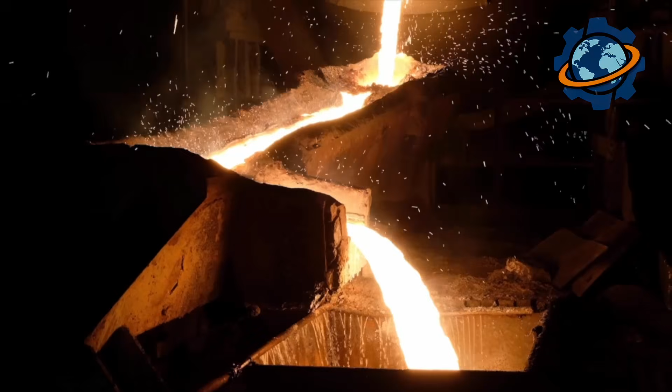Stand at Ground Zero, New York City. One World Trade Center rises 1,776 feet, a deliberate height honoring the Independence Year. This building contains a promise: it will never fall again. That promise lives in 45,000 tons of structural steel and 200,000 cubic yards of concrete.

But concrete alone crumbles under stress. What gives it strength are 300 million pounds of steel rebar, ribbed bars running through every column, every beam, every floor. Each bar began as scrap metal melted at 3,000 degrees, rolled into ribbed shape, cut to exact length, trucked from a South Carolina mill to Manhattan, and positioned with surgical precision.

How does a junked car become the foundation of America's safest building? Why does rebar require ribs instead of staying smooth? Stay with us. You'll witness an electric arc furnace creating artificial lightning and discover rebar's critical secret. Those ribs aren't decoration, they're a mechanical bond preventing concrete from tearing itself apart.

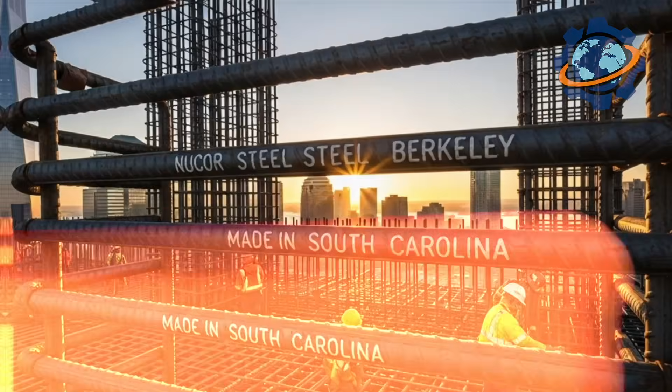Nucor Steel Berkeley in South Carolina produced most rebar for One World Trade Center. This facility processes 2 million tons of scrap steel annually, enough to build 12 Empire State Buildings yearly. The scrapyard stretches a quarter-mile. Mountains of crushed cars, demolished buildings, retired appliances, old rebar from previous demolitions. Giant electromagnets lift entire automobiles, dropping them into sorting lines separating steel grades.

Every day, 600 trucks deliver scrap. Every day, 400 trucks leave carrying finished rebar. Walk the scrap processing area. Shredders pulverize cars in 8 seconds, the same time it takes to read this sentence. Hydraulic shears cut structural beams like scissors through paper. The noise is relentless. Metal tearing metal, magnets clanging, conveyor belts grinding.

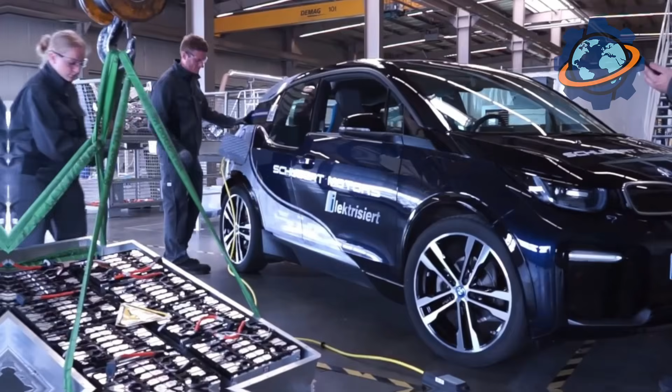The electric arc furnace transforms scrap into liquid steel through controlled lightning. This vessel, 40 feet in diameter and 30 feet deep, contains 3 graphite electrodes 2 feet thick descending from the roof. When 90 megawatts flow, power for 70,000 homes, arcs jump between electrodes and scrap, generating 5,800 degrees. The scrap melts in minutes. Watch through protective glass as metal liquefies, glowing white hot then orange as temperature stabilizes.

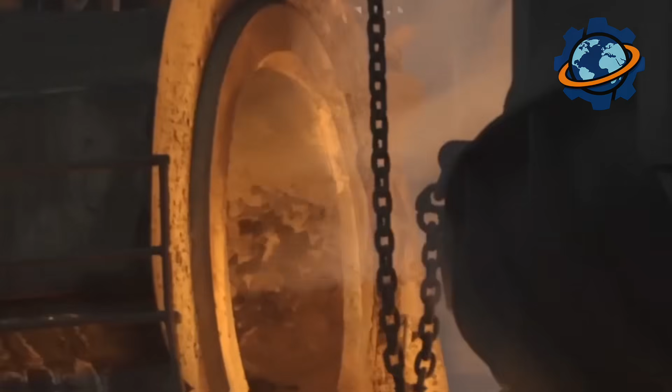200 tons of scrap loads per batch. The electrodes pierce the pile, current flows and artificial lightning strikes continuously. The sound resembles continuous thunder. The heat radiates through the observation room despite water-cooled walls. Oxygen lances inject pure oxygen at supersonic speeds, burning impurities. Carbon oxidizes to gas, sulfur evaporates. Phosphorus combines with lime, forming slag that floats atop molten steel.

Temperature control is absolute. Too hot wastes energy, too cool leaves impurities. Computer systems adjust power and oxygen flow thousands of times per melt, maintaining the exact chemistry required for construction-grade rebar. Tapping releases 200 tons of liquid steel into a ladle, a refractory-lined bucket mounted on a railcar. The pour takes 8 minutes, a continuous stream of glowing metal creating updrafts lifting dust into the air. Workers monitor from shielded stations, faces illuminated by orange glow.

The steel, now 3,050 degrees, travels to the continuous caster where transformation into solid bar begins. The caster pours molten steel into a water-cooled copper mold, oscillating rapidly. As steel contacts the mold, the outer shell solidifies while the interior remains liquid. The strand, a continuous ribbon of solid steel, emerges from the bottom, bent gradually from vertical to horizontal through a roller system.

Torches cut the continuous strand into billets 20 feet long, each weighing 4 tons. These billets, still glowing red at 1,800 degrees, feed directly into the rolling mill. The entire process from scrap to billet takes 90 minutes. For the WTC project, Berkeley ran 3 melts daily, producing 18,000 tons monthly during peak construction.

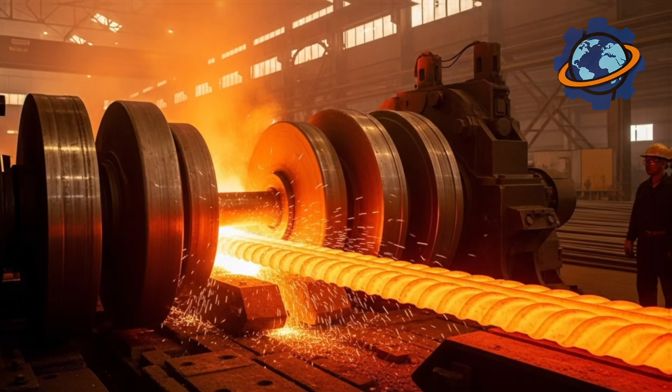The rolling mill transforms square billets into ribbed rebar through precision violence. The billet enters the roughing stand where rollers squeeze and elongate it, reducing thickness while increasing length. Each pass through successive roller stands further reduces diameter. The steel, maintained at 1,600 degrees, glows orange-red, extending like taffy under roller pressure. 22 passes transform a 4-ton billet into 500 feet of rebar.

But here's where rebar gets its identity: the ribs. Special roller dies emboss transverse ribs and longitudinal ridges onto the surface. These aren't decorative. The ribs increase surface area by 40%, creating a mechanical bond with concrete. Smooth bar would slip under stress. Concrete would crack and fail. Ribbed bar locks into concrete through friction and mechanical interlock.

The rib pattern follows precise standards: height, spacing, angle, all controlled to thousandths of an inch. For WTC, specifications demanded grade 75 steel, yielding at 75,000 psi, 3 times stronger than standard residential rebar. After rolling, the rebar, still 800 degrees, enters the cooling bed where water jets control cooling rate. Fast cooling creates hard but brittle steel. Slow cooling produces soft but weak steel.

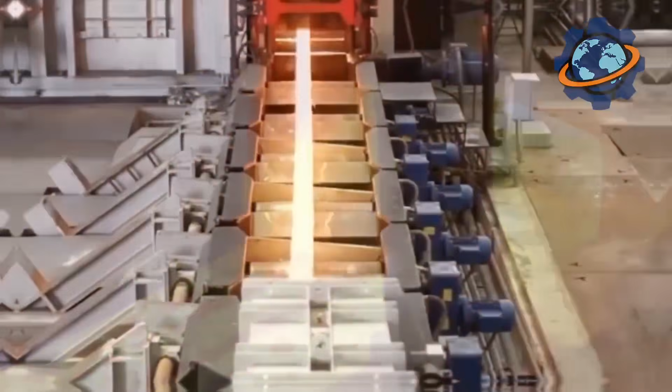Controlled cooling achieves optimal balance. Computer systems adjust water flow based on bar diameter, steel grade, ambient temperature. The bars cool from orange to black in minutes, steam rising in clouds.

Then comes straightening. The hot rolling process introduces slight curves. Straightening machines grab bars between sets of rollers positioned at angles, pulling and pushing until perfectly straight. Deviation under 0.01 inches per 40 feet.

Next, shearing machines cut bars to exact lengths. For WTC, typical lengths were 40 and 60 feet, sized to fit concrete forms with minimal waste. Flying shears cut moving rebar at speeds exceeding 20 feet per second. The cut must be square, clean, burr-free. Each bar gets stamped with grade marking and mill identification.

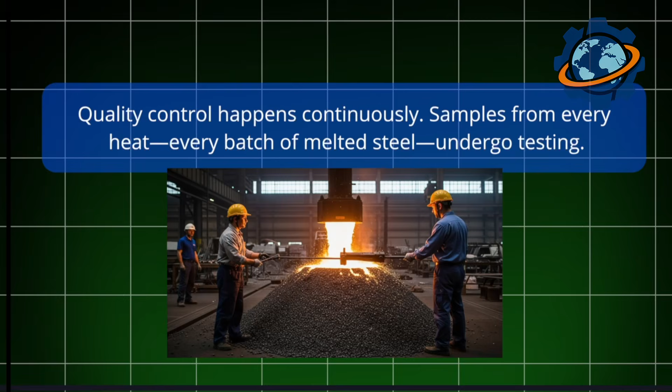Quality control happens continuously. Samples from every heat, every batch of melted steel, undergo testing. Tensile machines pull specimens until they break, measuring yield strength, ultimate strength, elongation. Chemical analysis verifies carbon, manganese, silicon content. Dimensional inspection confirms rib height, spacing, and bar diameter. Every bar carries traceability, heat number linking it to specific melt, specific chemistry, specific mechanical properties.

For the One World Trade Center project, quality standards exceeded normal construction. The Port Authority required additional certifications, independent testing, complete documentation. Rejected bars got remelted. No shortcuts existed. One quality inspector recalls, "Every bar we shipped could end up in a critical structural element. We tested knowing thousands of lives would depend on our work being perfect." The facility maintained a 99.8% acceptance rate, meaning just 2 bars per thousand required remelting.

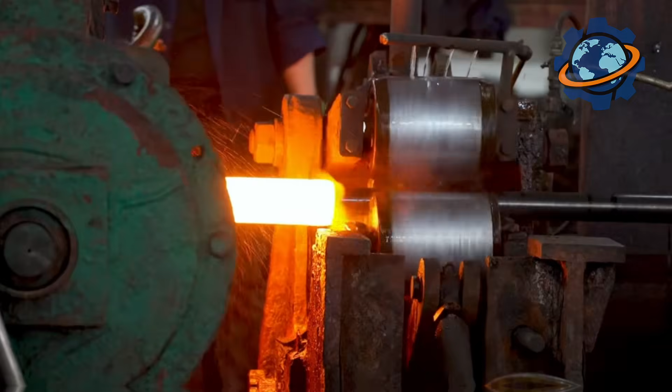Rebar's invention dates to 1850s France, when Joseph Monier, a gardener, reinforced concrete flower pots with iron mesh. He discovered concrete's compression strength, combined with iron's tensile strength, created a superior material. By the 1900s, rebar became standard in construction. The ribbed surface pattern emerged in the 1930s after engineers realized smooth bars failed under dynamic loading. Earthquakes, wind, vibration caused concrete to slip along smooth bars.

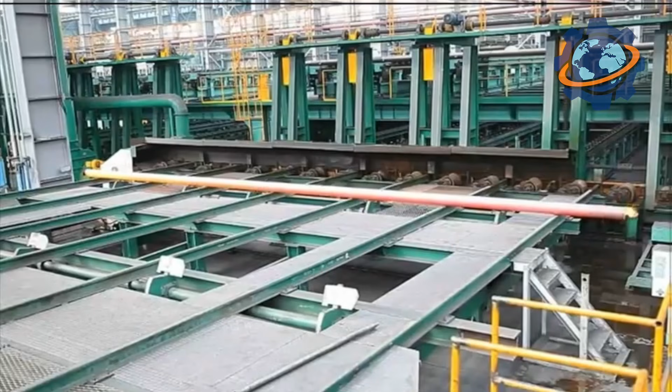One World Trade Center's foundation began in 2006, final steel placed in 2012. During construction, 600 trucks daily delivered materials to the Manhattan site. Rebar arrived on flatbed trucks, each carrying 25 tons, 40 to 50 bars per load. Cranes lifted bundles to specific floors where iron workers tied bars into 3-dimensional cages matching structural drawings. For the concrete core, the building's spine, rebar spacing was 4 inches on center in both directions, creating steel mesh so dense you could barely see through it.

Environmental impact shows an interesting paradox. Producing rebar from recycled scrap uses 60% less energy than making steel from iron ore. The Berkeley facility prevented mining 200,000 tons of iron ore annually. Yet steelmaking remains carbon intensive. Melting metal requires massive electricity. Each ton of rebar generates 1.8 tons of CO2 emissions. For WTC's 300 million pounds, that meant 270,000 tons of CO2, equivalent to annual emissions from 30,000 cars.

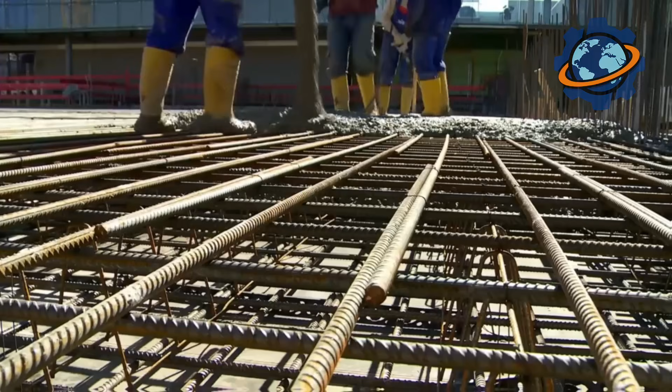Here's the secret we promised. Rebar ribs create mechanical bond, but their real genius is crack control. Concrete always cracks. Thermal expansion, settling, loading all cause microscopic fractures. Smooth rebar allows cracks to propagate, widening until failure. Ribbed rebar intercepts cracks, distributing stress across multiple ribs, preventing a single crack from becoming catastrophic failure. Those ribs transform concrete from brittle material into a ductile system that bends before breaking.

At WTC, this matters profoundly. The building must survive impacts, explosions, earthquakes that would destroy conventional structures. From South Carolina scrapyard to Freedom Tower rising above Manhattan, the transformation completes. Nucor Berkeley melted America's discarded metal and reformed it into a symbol of resilience. That rebar, 300 million pounds of it, creates skeletons stronger than the original towers. Every bar positioned perfectly, every connection inspected, every pour documented.

The building stands because thousands of workers understood. This isn't just construction, it's a promise. A promise that engineering will triumph over terror, that steel and concrete and human determination can create something genuinely unbreakable. Those ribs running through every column aren't just preventing concrete failure, they're preventing failure of a different kind. The failure to rebuild, to remember, to rise again.

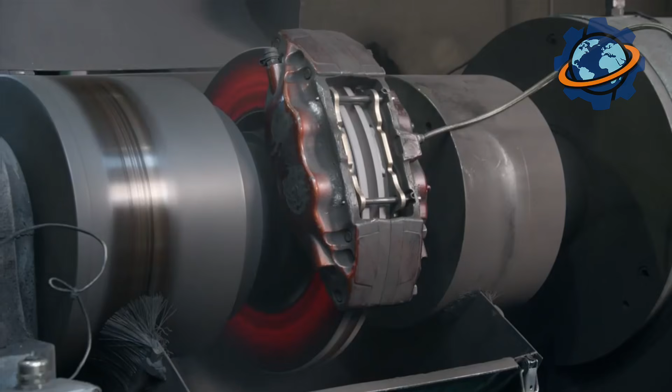Every year, billions of people around the world press the same pedal, and they don't even realize it was slowly killing them for decades. What was supposed to save lives quietly filled the air with poison. Why did a material once considered perfect vanish almost overnight? And what replaced it? There's one detail brake pad ads never mention, but it's what determines whether your car stops in that critical split second.

Today, these pads withstand hell itself, don't smoke, and leave barely a trace. But the road here was deadly dangerous. Stick around till the end, and you'll discover which hidden component once cost millions of lives and why modern factories guard their formulas like state secrets. In the 1920s, every brake pad contained asbestos, fibers that could handle 1500 degrees Fahrenheit and wouldn't wear out.

But every tap of the pedal released microns of poison into the air, settling in the lungs of drivers and pedestrians. By the 1990s, asbestos had killed millions. Lung cancer, mesothelioma. Europe banned it first in 1998. Manufacturers scrambled to find a replacement.

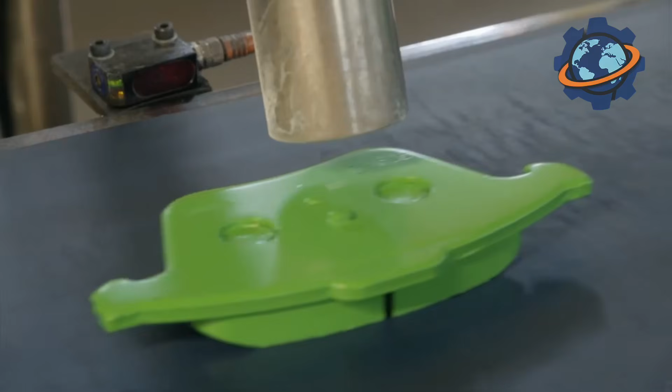The material withstands 650 degrees without deforming, doesn't squeal, and doesn't dust. Ceramic makes up 40 or 50% of the mass, reinforced with steel fibers for strength. At 500 degrees, regular pads smoke. Ceramic ones stay cool as ice. In this massive plant, something is born that'll save your life on the road.

Manufacturing ceramic brake pads isn't just mixing powder with binder. It's precise science involving pressure, fire, and high-precision machinery. Each pad weighing 7 ounces has to survive 600 degrees of hell, not crumble, and not let go of the rotor. Let's break down the process step by step, from raw materials to finished kit.

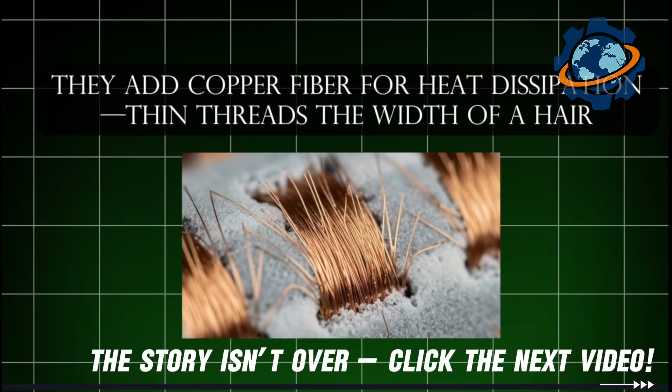Everything starts with hoppers full of powders. The main ingredient, ceramic, meaning silicon nitride and silicon carbide, a white powder hard as diamond. They add copper fiber for heat dissipation, thin threads the width of a hair, graphite for smooth grip, reinforced glass for strength, barium sulfate for stability at high temperatures. Each recipe is a factory secret, like the Coca-Cola formula.

In giant mixers with a 500-gallon capacity, powders are combined in precise proportions. They add liquid wax-based lubricant, 5 or 7% by weight. The mixer spins for 30 minutes at 50 revolutions per minute, transforming dry powder into a uniform wet mass, like bread dough. Temperature is held at 100 degrees so the lubricant doesn't freeze. The result is raw dough weighing 1,100 pounds, ready for forming.

The mass goes into a rotary press, a machine with 20 tons of force. They pour 550 grains of the mixture into a metal mold measuring 6 by 2.5 by half an inch. The top plate descends with 285,000 pounds per square foot of pressure, like parking a tank on your palm. In 10 seconds, the dough compresses into a monolithic green blank, 3/4 of an inch thick.

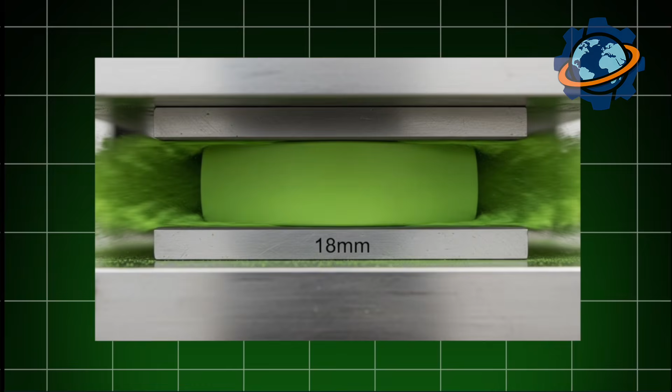The pressure squeezes out all the air, creating a density of 175 pounds per cubic foot. The press runs in cycles, 60 blanks per hour. Each comes out perfectly smooth with a friction surface angled at 5 degrees for better disc contact. The blank's still brittle as chalk, but it already has the shape of the future pad.

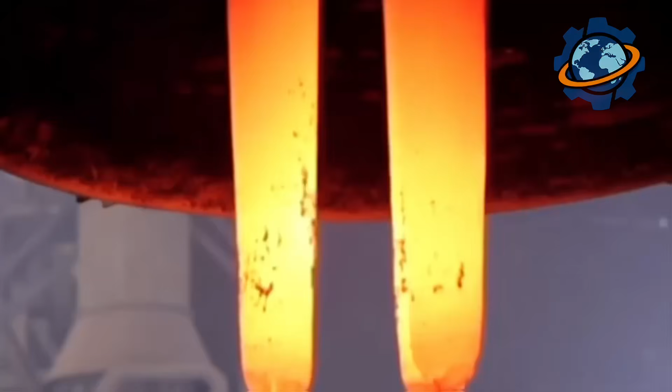The most critical stage? Sintering. Green blanks go onto steel trays, 50 pieces each, then get pushed into a tunnel kiln 100 feet long. Temperature rises gradually. At peak heating, 4 hours in, the ceramic melts. Copper fibers fuse. Graphite crystallizes. Total sintering time, 12 hours. Finished pads, gray-silver monoliths, go to inspection.

A laser scanner checks dimensions accurate to 1/100th of a millimeter. Ultrasound checks density and cracks. 2% get rejected. Next, grinding. The machine removes 0.5 millimeter from the friction surface for perfect geometry. Edges get rounded to prevent squealing. They apply a protective coating, a thin layer of molybdenum disulfide for that first soft braking. Laser marked, then assembled into kits, 4 pads plus springs plus backing plate.

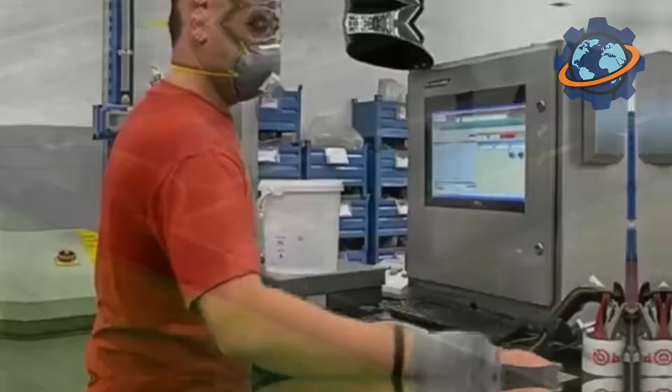The final test, the simulation stand. The pad is pressed against a disc spinning 2,000 revolutions per minute for 200 cycles. Acceleration, then hard braking up to 600 degrees. They check wear, squealing, dust. Ceramic pads pass without smoke. Metal ones squeal. A finished pad wears out after 30,000 miles. That's normal wear. With aggressive driving, it wears out after 18,000 miles.

The U.S. market operates with 131 facilities, which has decreased by 0.6% in recent years due to automation. Production is tied to the automotive industry. Rising car sales drive demand, especially for pad replacements in trucks and passenger vehicles. Key trends: shifting to eco-friendly materials without copper. California capped it at 0.5% starting in 2025, which cut pollution by 28% statewide. Imports matter, but tariffs affect local production. The leaders are the southern U.S., specifically Texas, Alabama, Tennessee, with Ford and GM plants.

The European brake pad market shows steady growth at an average annual rate of 4.7% through 2028. In Germany, the market leader, volume will hit nearly $320 million by 2028. France is growing at 5.5% annually, the UK at 3.8%. Metallic pads are still popular and hold 25% of the EU market because they're cheap for trucks and Porsches.

But their dust is a problem. Steel and copper settle on roads, get into water and lungs. Ceramic cuts emissions by 80% compared to these semi-metallics. Now, besides asbestos and metallic pads, there was an attempt to make organic ones. These are pads from the 2000s, the first mass replacement for asbestos.

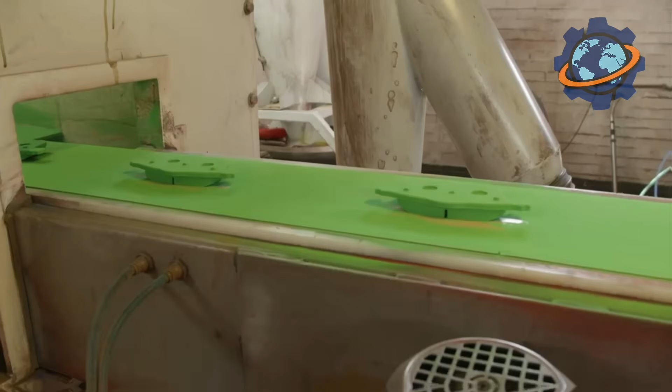The base is synthetic rubber, fiberglass for reinforcement, Kevlar or aramid fibers for strength, plus barium sulfate and graphite. The soft compound gave a quiet bite. Little dust, didn't scratch rotors. But at 550 degrees, they lose 30% of their stopping power, which works for daily driving but not for sport.

Every year, over 40 million new gadgets hit the market, but almost nobody knows about the metal that makes them actually work. Why can a tiny element buried deep underground literally launch an entire civilization, from the Bronze Age to modern electronics? And what do ancient swords, tin cans, and your smartphone have in common? In this video, we're uncovering the secret of tin, the metal that built the past, runs the present, and hides a fact you've definitely never heard before.

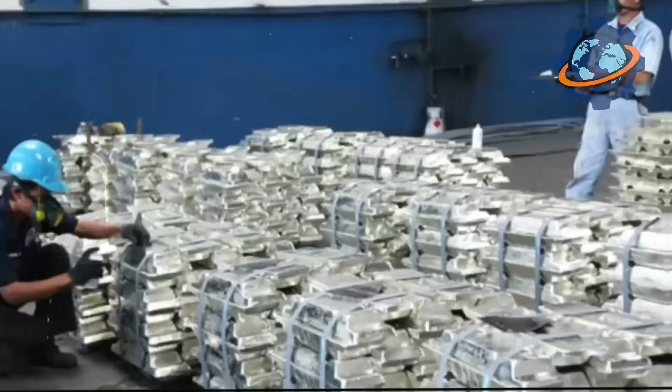Tin isn't just some new trend. This is a metal with a deep-rooted history spanning thousands of years. Its discovery sparked a genuine revolution that forever transformed the course of human civilization, launching what we call the Bronze Age. Picture this. Ancient craftsmen learned to extract copper and forge tools from it. But copper was soft. Then, whether by accident or experimentation, they discovered something remarkable.

If you added a little bit of another then unknown metal to molten copper, the alloy became incredibly strong, hard, easier to cast, and held a sharper edge. That metal was tin. The copper-tin alloy became known as bronze. Bronze swords, shields, tools, jewelry, all of this suddenly became accessible, giving ancient civilizations a massive advantage. It was a true technological leap that transformed warfare, agriculture, and art.

Tin became so valuable that real battles were fought over its deposits, and trade routes to tin mines, like those in Cornwall, Britain, were incredibly important. Over the centuries, tin stayed valuable. It was used as a coating for other metals to protect them from corrosion. For example, tin plate, a thin sheet of steel coated with tin, which was used to make cans. It was also used to make soft solders that joined metals together, and in the production of mirrors, and even to create organ pipes and coins.

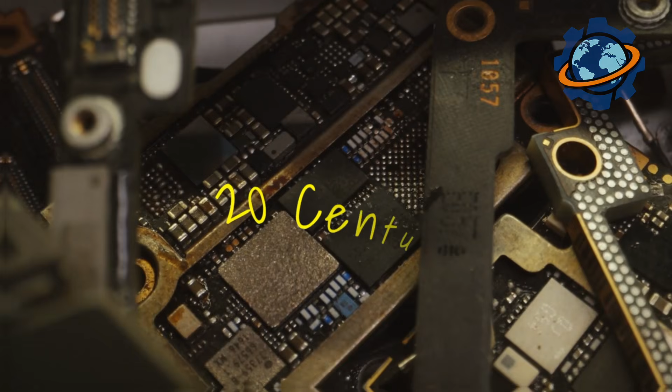But its true renaissance came in the 20th century with the rise of electronics. Over 50% of all global tin consumption goes to this industry. Solder. That's its main job. Your computer, smartphone, TV, inside them, thousands of electrical components are connected together. These connections are made using solder, which is usually an alloy of tin with other metals, like lead in the past, now mostly with copper, silver, or nickel.

Tin is perfect for solder because it has a relatively low melting point, which makes it easy to melt and form connections without damaging sensitive electronic components. Tin also wets metals, meaning it easily flows across the surface, creating a strong electrical and mechanical bond. It's got great electrical conductivity too, and it's corrosion resistant.

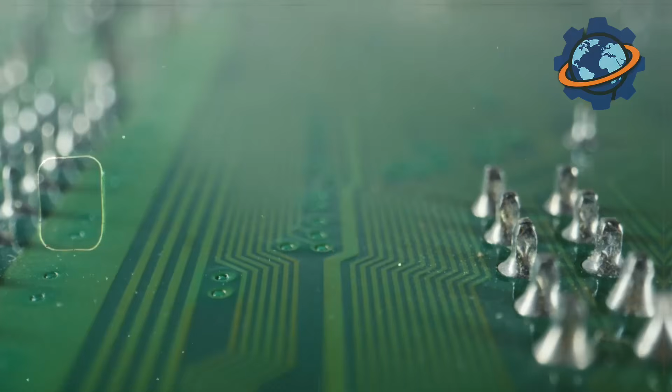Modern electronics use what's called lead-free solder, which is a huge step forward for the environment. Tin is the main component in these alloys. Without reliable soldered connections, the entire complex architecture of microchips would simply fall apart, and your gadget would turn into a pile of useless parts.

Tin is used to coat other metals, especially copper, on printed circuit boards. This protects the copper traces from oxidation and makes the soldering process easier. It's also used to coat connectors, which improves their electrical conductivity and corrosion resistance. Tin isn't a super common element in the Earth's crust. Its primary mineral is cassiterite, basically tin oxide. It's a pretty dense mineral that's often found in placer deposits, meaning you can extract it from river sediments or ancient coastlines.

Over 70% of the world's tin production is concentrated in 4 countries across Southeast Asia and South America: China, Indonesia, Myanmar, and Peru. This makes the tin market highly sensitive to political and economic events in these regions. Tin mining begins with the exploration phase. Geologists, armed with modern technology, conduct surveys, drilling, and analysis of soil and rock samples to find locations where cassiterite concentrations are high enough for economically viable extraction.

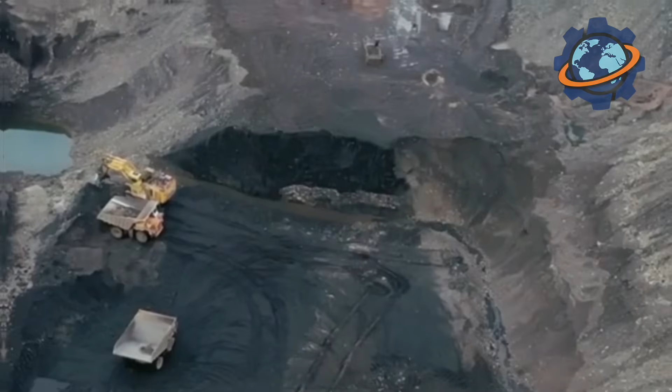Once a deposit is identified, development begins, which can follow 2 main paths depending on the type of deposit. The first and most common method of tin mining is from placer deposits. Picture this. Over millions of years, cassiterite washed from bedrock by water and erosion accumulated in riverbeds, at the bottom of lakes, or on ancient seashores.

It settled like sand in what's called placer deposits. Extracting from these deposits is often way simpler than digging underground mines. Here, they use massive dredges, floating factories that scoop up tons of soil and gravel from the bottom of waterways, or they deploy hydraulic monitors, powerful jets of water under high pressure that blast away soil from riverbanks or hillsides containing cassiterite. The blasted rock then flows to primary processing, where gravity methods, exploiting density differences, separate the cassiterite from lighter waste rock. Think industrial-scale gold panning, only gigantic.

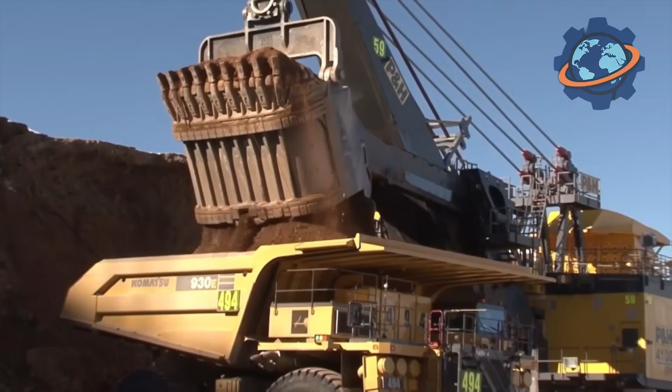The second method? Extracting from primary deposits, where cassiterite sits directly in solid rock. That's where traditional underground mines come in, same as mining any other metal. Miners drill tunnels and boreholes into the rock, use explosives to blast apart the ore vein, then loaders collect the ore and haul it to the surface. It's a more expensive and complex operation, requiring heavy-duty equipment and strict safety protocols.

Once extracted, the ore, no matter where it came from, heads to a processing plant. First, it's crushed and ground into a very fine powder in mills to free the cassiterite crystals from the surrounding rock. Then various enrichment methods kick in. The first method, gravity separation. Since cassiterite is a pretty dense mineral, it gets separated from lighter minerals using water. This can happen in jigs, concentration tables, or spiral separators.

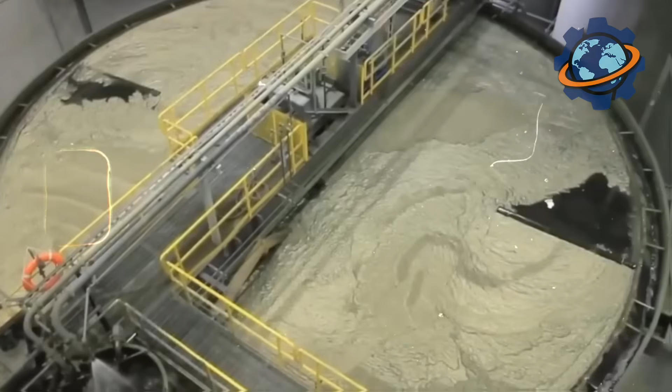The second method is flotation. Sometimes, for further enrichment or to separate cassiterite from other minerals, flotation is used, where cassiterite selectively sticks to air bubbles and rises to the surface as foam. As a result of all these processes, a tin concentrate is obtained that already contains more than 50% cassiterite, or even more. This concentrate then goes to a metallurgical plant to produce pure metallic tin.

Here, the concentrate, which is tin oxide, is mixed with coal, which acts as a reducing agent, and fluxes. Fluxes are substances that help separate impurities. This mixture is heated in special furnaces to high temperatures, typically around 2400 degrees Fahrenheit. At these temperatures, the carbon steals the oxygen from the tin oxide, releasing pure metallic tin, which melts and flows to the bottom of the furnace.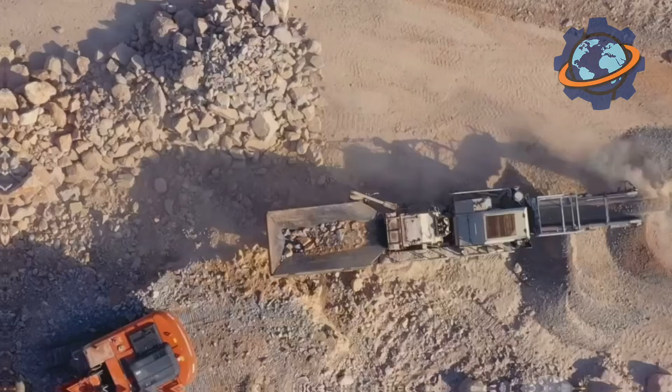How do they turn gray ore, mined a mile underground, into a bluish-silver metal that sacrifices itself for others? You'll learn why the ore burns in furnaces, how they collect metallic vapor, and why without zinc, the entire infrastructure of the planet would collapse. Watch till the end. The finale will show what's behind every galvanized beam. This is the story of the bodyguard metal that took on the corrosion of the entire world.

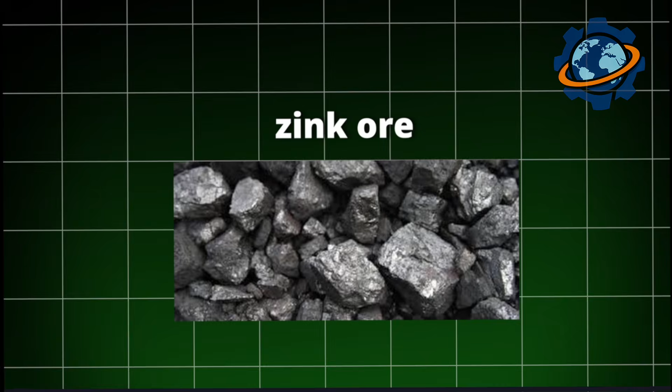A mile underground, darkness, explosion, tons of rock crash down. This is a zinc mine, one of hundreds around the world where ore for the guardian metal is extracted every day. Underground dump trucks with 50-ton capacity haul ore to the mine shaft. An elevator the size of a house lifts the rock to the surface. The ore is dark, almost black. This is sphalerite, zinc sulfide. Crystals with diamond-like brilliance, but the metal content is only 10 to 15%. The rest is waste rock.

Trucks carry the ore to the processing plant. The transformation from stone to metal begins. Massive cone crushers as tall as a 3-story building grind ore chunks the size of cars. The noise is deafening. The rock is crushed into gravel the size of fists. Then the gravel goes into ball mills, rotating steel drums 16 feet in diameter, filled with steel balls the size of watermelons. The drum rotates, balls fall, grinding the ore into fine powder. After 8 hours of grinding, you get gray dust, particles the size of sand grains.

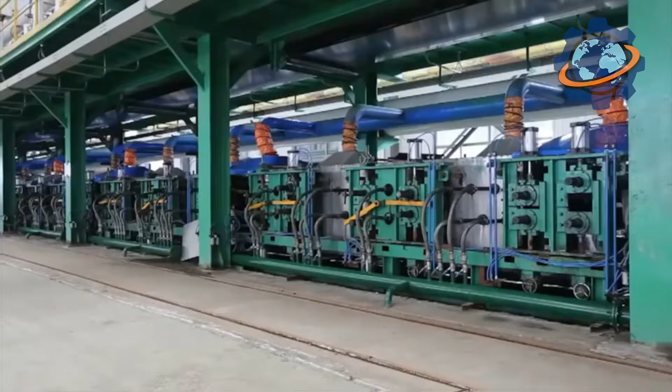The ore powder is mixed with water, creating gray liquid slurry called pulp. It's pumped into huge flotation machines, tanks with volumes of 3,500 cubic feet. Chemical reagents are added, foaming agents and collectors.

Mixers are turned on and air is fed from below. The magic of flotation begins. Millions of air bubbles rise through the pulp. Particles of sphalerite, zinc ore, stick to the bubbles and float up. A gray foam forms on the surface, 20 inches thick. This foam contains zinc. Waste rock settles to the bottom and is drained off.

The foam is collected, filtered, dried. The result is concentrate, powder containing 50 to 60% zinc. From 100 tons of ore, you get 10 to 15 tons of concentrate. This concentrate is loaded into rail cars and shipped to the smelting plant. There begins the real alchemy, turning powder into molten metal. And this is a process where metal turns into vapor.

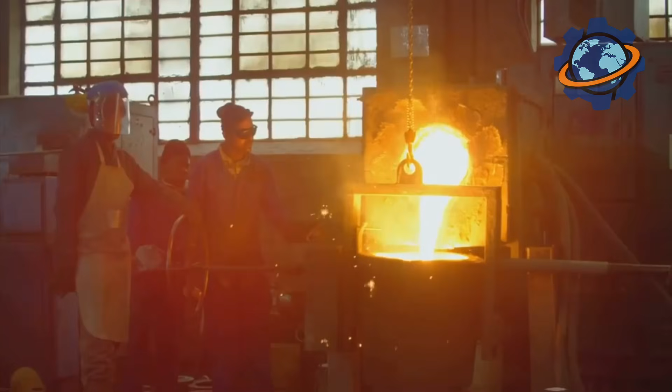At the plant, concentrate is loaded into fluid bed roasters, massive steel cylinders 66 feet tall. Hot air under pressure is blown in from below. The concentrate powder lifts up, floating in the air like dust. Gas burners are ignited. Temperature rises to 1,650 degrees Fahrenheit. The zinc sulfide ignites. Yes, the ore burns.

Sulfur oxidizes, releasing enormous amounts of heat. Sulfur gas flies up the stacks. It will be captured and turned into sulfuric acid. And zinc sulfide transforms into zinc oxide, a gray-white powder. The temperature in the furnace is so high that the walls glow red.

The roasted concentrate, zinc oxide, is cooled and mixed with coke, crushed coal. The proportion, 3 parts oxide to 1 part coke. This mixture is loaded into vertical retort furnaces, steel towers 50 feet tall, lined inside with refractory silicon carbide. Heating begins. Temperature starts climbing. 1,800 degrees, 2,000 degrees, 2,200 degrees.

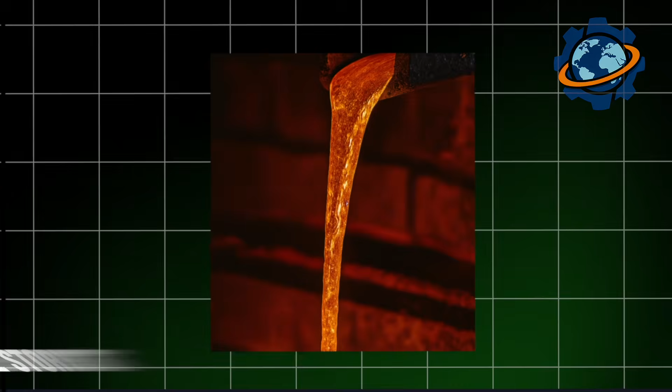At 2,200 degrees Fahrenheit, carbon begins taking oxygen away from zinc oxide. A reduction reaction occurs. But something amazing happens. Zinc doesn't melt. Its boiling point is only 1,665 degrees, but the furnace is at 2,200. So zinc immediately turns into vapor, metallic vapor. Inside the furnace, atoms of gaseous zinc are flying around. The vapors rise up and exit the furnace through piping.

They enter a condenser, a special cooled chamber. Temperature in the condenser is around 840 degrees, below boiling point but above melting point of zinc. The vapors condense. Drops of molten zinc settle on the condenser walls, glowing orange. Liquid metal flows down the walls and collects in a receiver.

This is crude zinc, contains impurities of lead, cadmium, iron. Purity around 98%. Each furnace produces up to 100 tons of zinc per day. The metal is cast into molds. The result is ingot bars weighing 55 pounds each, silver gray with a bluish tint.

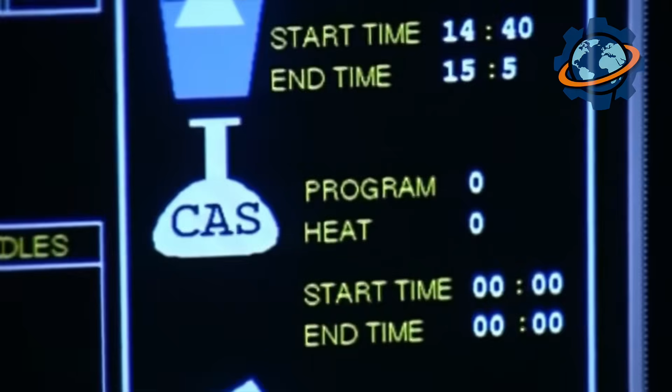For some applications, pure zinc is needed. Then it's refined, purified by distillation. Crude zinc is heated to boiling in a vacuum furnace. Under reduced pressure, boiling point drops to 1,300 degrees. Zinc vaporizes while impurities remain solid. Zinc vapors are condensed in a cooler. The result is refined zinc with 99.99% purity. This zinc is cast into ingots.

On the ingot surfaces, a characteristic pattern forms, crystalline designs resembling frost flowers on glass. This is called zinc flowers. Ingots are stacked. Zinc is ready for use. But its main application awaits in hot-dip galvanizing baths. There, steel products will receive corrosion protection. The process looks impressive, like baptism of metal by fire.

A steel beam 40 feet long is immersed in a bath of molten zinc. Temperature 840 degrees. The beam completely disappears in the silvery liquid. Chemical reaction begins instantly. Zinc reacts with iron on the steel surface, forming a layer of intermetallic compounds, a solid alloy of zinc and iron. This layer bonds permanently to the steel. On top, a layer of pure liquid zinc.

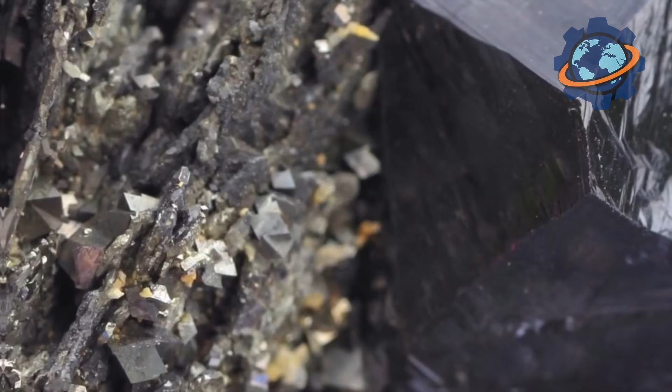The beam is held in the bath for 1 to 2 minutes. Then it's pulled out. Excess molten zinc drains back. In air, the coating quickly solidifies. The surface becomes silvery, matte, with the characteristic pattern of crystals, zinc flowers. Coating thickness from 2 to 8 thousandths of an inch. That's just fractions of an inch, but it's enough. The galvanized beam won't rust for 50 to 70 years.

Even scratches aren't scary. Zinc continues protecting. It's about electrochemistry. Zinc is more active than iron. When corrosion begins, zinc oxidizes, not steel. Zinc sacrifices itself, protecting iron. This is called cathodic protection.

World production of galvanized steel, 55 million tons annually. This uses 6 million tons of zinc. Without zinc, modern cities would be impossible. 70% of zinc goes to protecting steel. But there are other applications.

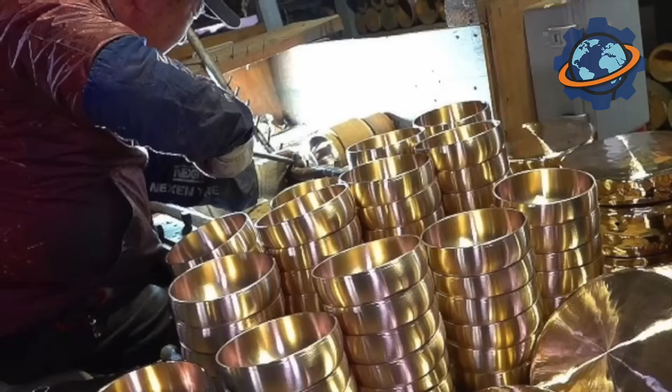Brass, an alloy of copper and zinc, has been known for thousands of years. Contains 15 to 45% zinc. Golden, strong, easily worked. Brass is used for plumbing fixtures, musical instruments, cartridge cases, decorative items.

Zinc die casting, a method for manufacturing complex parts for automotives and electronics. Molten zinc is injected under pressure into steel molds. The result is complex-shaped parts accurate to tenths of thousandths of an inch. Zinc batteries, still used by the billions. Zinc powder in chemical industry. Zinc oxide in rubber industry, cosmetics, medicine.

Zinc ointment heals wounds. World zinc mining, 14 million tons per year. China produces 40%, 5.5 million tons. Peru, Australia, USA, India, other major producers. Zinc price, around $3,000 per ton.

The history of zinc as a separate metal began late. Europeans knew brass since ancient Rome, but couldn't obtain pure zinc. The problem: zinc evaporates when heated. Indian and Chinese metallurgists in the 16th century learned to condense zinc vapors in closed retorts.

In Europe, pure zinc was obtained by German chemist Andreas Markgraf in 1746. But mass production began in the 19th century. Revolution happened in 1836 when French engineer Stanislas Sorel discovered the hot galvanizing process. He found that immersing steel in molten zinc protects from corrosion.

This changed construction forever. Before galvanizing, steel structures rusted within years. With galvanizing, they serve for decades. The Eiffel Tower is painted, but many bridges from that era are galvanized and still standing. Today, without galvanized steel, skyscrapers, bridges, power lines, ships are impossible. Zinc, the invisible guardian of infrastructure.

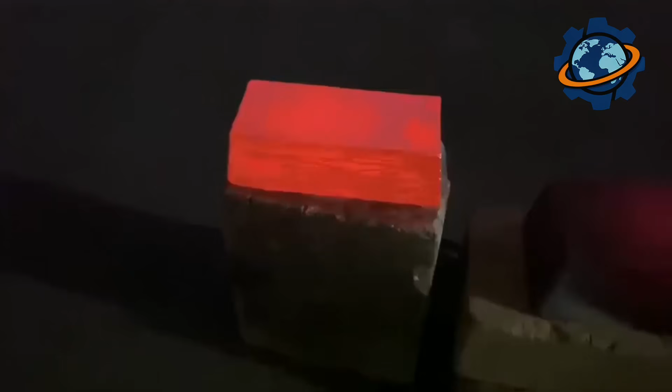And so, having traveled from explosions a mile deep through giant crushers and flotation tanks, through fluid bed furnaces at 1,650 degrees and retort towers at 2,200, through transformation into metallic vapor and condensation, zinc emerges, the bodyguard metal of modern civilization. The silvery metal that sacrifices itself, protecting steel from rust. The fourth largest metal by production on the planet, without which all infrastructure would collapse.

Every time you see a steel bridge beam, a roofing sheet, or a car body, know they're protected by a thin layer of zinc as thick as a human hair. A layer that takes on corrosion, oxidizes instead of steel, slowly destroys itself, saving the structure. This is a story of nobility at the atomic level, how one metal protects another, sacrificing itself.

From underground explosions to silvery skyscraper beams, zinc's journey spans several weeks and 2,200 degrees. The metal that vaporizes to protect, that oxidizes so others don't rust. The invisible shield of 14 million tons annually, standing between steel and corrosion. Zinc. This is why bridges don't collapse, roofs don't leak, and cars don't turn to dust in 5 years. The guardian metal, the sacrificial metal, the metal without which the modern world would simply fall apart from rust.

How does rust-colored rock transform into gleaming steel skyscrapers? How do ancient mountains become modern civilization? Stick around till the end. You'll discover why iron shaped human history more than gold ever did, and the jaw-dropping secret hiding inside every bridge, car, and building around you right now.

The story begins in Western Australia's Pilbara region, where iron mountains stretch across landscapes older than dinosaurs. Massive excavators, standing 8 stories tall, picture buildings that walk, tear into rust-red cliffs with bucket teeth weighing 12 tons each. These mechanical giants rip through rock layers formed 3 billion years ago when Earth's oceans first rusted.

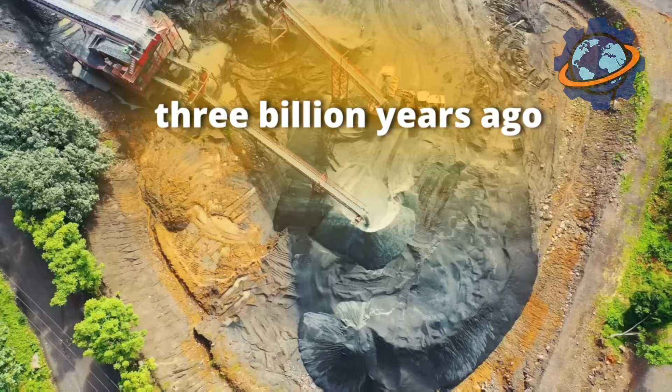Next comes crushing, where house-sized jaw crushers, imagine dinosaur mouths made of hardened steel, pulverize boulders into gravel-sized chunks. With deafening roars splitting eardrums even through protection, these crushers generate forces exceeding 20,000 pounds per square inch. Clouds of red dust billowing upward create artificial sunsets visible from space satellites.

Conveyor belts stretching 12 miles long, longer than Manhattan, transport crushed ore at 18 miles per hour. Workers riding inspection carts traverse distances requiring 25 minutes one way. That's enough belt to wrap around 300 football fields. Every hour, 50,000 tons flow through this system, weight equivalent to 5 Eiffel Towers moving continuously past checkpoints.

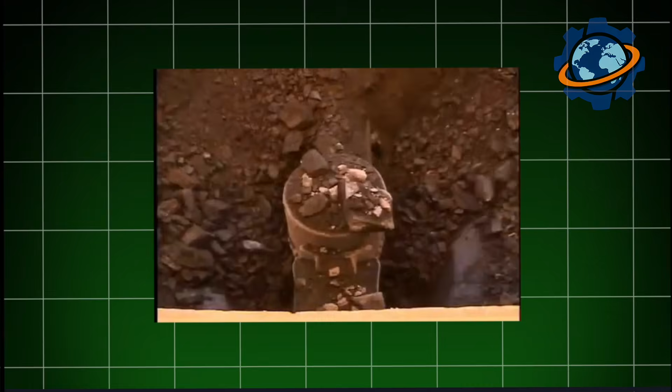Giant grinding mills, standing 5 stories tall, with diameters matching Olympic swimming pool widths, pulverize rock into fine powder. Inside these rotating drums, 20-ton steel balls, each weighing more than shipping containers, tumble with ore, creating grinding thunder heard miles away. Operators monitor vibrations. Wrong frequencies mean catastrophic bearing failures, costing millions.

At rotation speeds creating gravitational forces triple normal Earth gravity, particles shrink to powder finer than talcum. Processing 8,000 tons hourly, that's filling semi-truck after semi-truck every 30 seconds. This powder, called concentrate, contains 65% iron. Magnetic separators then extract iron particles using forces strong enough to levitate railroad spikes, leaving waste rock behind.

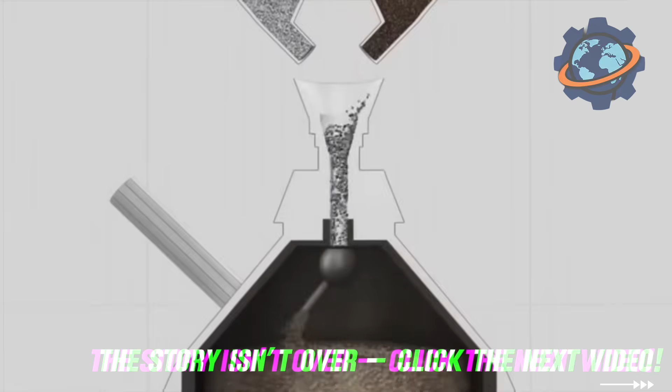Next comes the blast furnace, a towering inferno standing 30 stories high, its steel shell glowing dull orange even from outside. At internal temperatures exceeding 3,000 degrees Fahrenheit, hot enough to vaporize aluminum instantly, iron ore transforms into liquid metal. Picture Dante's Inferno engineered with precision.

Measured charges of iron ore, coke, and limestone descend from the top, while superheated air blasts upward at 2,000 degrees from ring-shaped nozzles called tuyeres. This creates a raging chemical storm, where carbon monoxide rips oxygen from iron oxide molecules. The reaction releases enough heat to melt granite. Every 3 minutes, sensors check 20 different parameters. Without precision, furnaces explode with force demolishing city blocks.

The blast furnace operates continuously for 15 years, never cooling, never stopping, like Earth's core relocated to industrial facilities. Inside this chemical reactor, materials descend through distinct zones. Upper regions preheat incoming ore. Middle zones drive off moisture and carbon dioxide. Lower depths become hell itself, where iron liquefies. At the hearth bottom, molten iron collects at 2,800 degrees Fahrenheit, dense as lead but flowing like water.

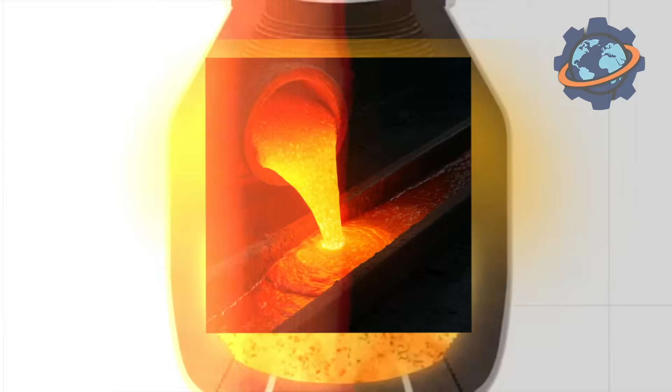After tapping, slag, lighter impurities floating atop molten iron, gets diverted into separate channels. This glowing amber liquid, essentially liquefied rock, contains calcium, silicon, and aluminum oxides stripped from ore. Rather than waste, it becomes roadbed material and cement ingredient recycled at 98% rates globally.

The molten iron, called pig iron, contains 4% carbon, too brittle for construction. Picture glass that looks metallic. Drop pig iron from waist height, it shatters into fragments. Next comes the basic oxygen furnace, where pure oxygen blasted at supersonic speeds through 3-foot diameter lances burns away excess carbon in 17 minutes. Flames shooting 70 feet high, temperatures hitting 3,200 degrees, create hurricane-force winds inside steel vessels holding 350 tons of liquid metal.

Steel making requires precision rivaling brain surgery. Computer-controlled oxygen flow adjusts by milliseconds. Operators add exact amounts of manganese, silicon, chromium, elements changing steel properties dramatically. Too much carbon, steel cracks in winter cold. Too little, metal bends under load.

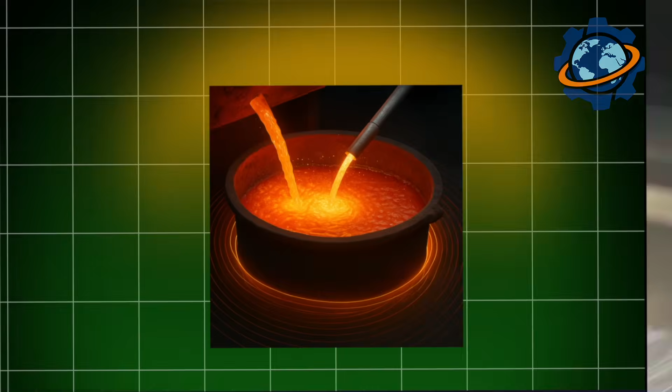Picture this: alloying elements get injected via submerged lances. Electromagnetic stirring, invisible but powerful, homogenizes composition. Samples extracted every 3 minutes get analyzed via spectrometers, determining chemistry within seconds. Modern furnaces achieve carbon content accuracy to 0.01%, the difference between a skyscraper standing or collapsing. After refining, liquid steel flows into continuous casting machines producing slabs 30 feet long, weighing 25 tons, at rates of 1 slab every 90 seconds.

This wasn't always so advanced. Back in ancient Anatolia around 1300 BC, Hittite metallurgists discovered heating iron ore with charcoal produced workable metal. That breakthrough, accidental furnace conditions reaching iron's melting point, changed human civilization forever. Iron tools outperformed bronze, enabling an agriculture revolution.

The breakthrough came when British inventor Henry Bessemer patented his converter in 1856, slashing steel production time from 24 hours to 17 minutes. Suddenly, steel costs dropped 90%. This single invention built modern cities. Skyscrapers, bridges, railroads exploded across continents.

Today, global steel production exceeds 1.9 billion tons annually. That's enough to build 75,000 Eiffel Towers yearly, or manufacture 43 million automobiles, or construct bridges connecting every coastline on Earth. Carbon emissions drop by 62% when using recycled steel versus virgin ore, equivalent to removing 12 million cars annually. Industry saves over $80 billion yearly through scrap recycling. Processing costs drop 43% because melting scrap requires 1/3 the energy of blast furnaces.

So here's the secret promised. Every ton of steel you see, bridges, buildings, cars, will be recycled indefinitely. Unlike plastic decomposing into microparticles or paper pulping into mush, steel never degrades. Magnetic separation extracts it perfectly from demolished structures. That girder in your office building might contain steel from 1930s locomotives. Your car's frame could include battleship armor from World War II.

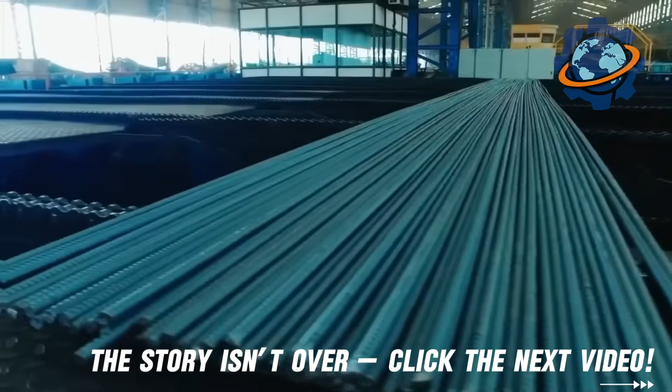Nothing disappears. Metal merely transforms, reborn eternally. From ancient mountains to modern marvels, the cycle completes. Iron, humanity's most essential metal, circulates through civilization like blood through veins. We're not consuming Earth's iron, we're borrowing it, briefly, before passing it forward to futures we'll never see.

Imagine a magnet so powerful it can lift a weight 1,000 times its own. How can a piece of metal stop a jet engine turbine or become the heart of a Tesla electric motor? The secret lies in rare earth elements, materials that hide more mysteries than gold or platinum. To create a single neodymium magnet, you have to move mountains of ore, melt metal at over 2,700 degrees, and use technologies that resemble alchemy. But there's a detail that almost no one knows about. Watch till the end, and you'll learn a secret that will change your understanding of the power of metal.

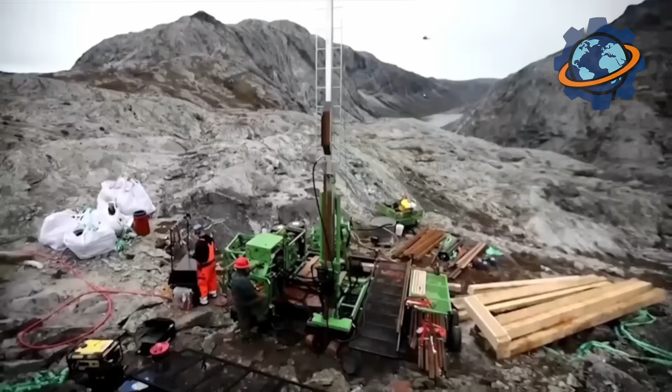The mining and initial processing of rare earth ores are a key stage in the production of neodymium magnets, as this is where the foundations for obtaining the necessary components are laid. This process begins with the large-scale mining of ore, containing the rare earth elements that make up neodymium. In the first stage, the ore is extracted from the earth using various mining methods. This can be either open-pit mining or underground mining, depending on the depth and type of the deposit.

After extraction, large chunks of ore are delivered to crushing plants. At the crushing plants, the ore undergoes primary crushing. Large boulders of ore pass through a series of crushers that gradually reduce their size into smaller fractions. This is necessary for further effective processing and extraction of valuable components. The crushed ore may then be fed into mills for further fine grinding into a powder or a pulp, which consists of fine ore particles suspended in water.

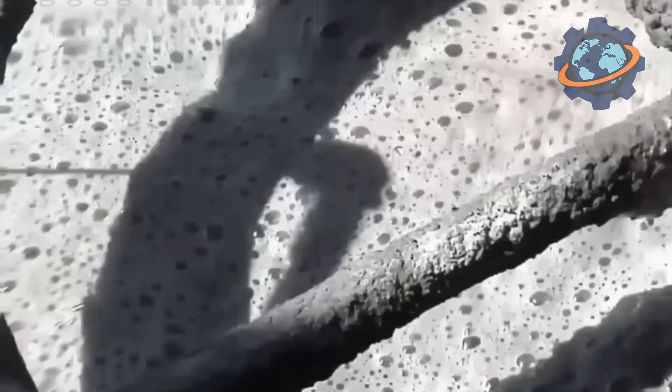The next critically important stage is ore enrichment, the purpose of which is to separate the rare earth minerals from the waste rock. This process can involve various methods. One of the most common methods involves mixing the crushed ore with water and special reagents. These reagents selectively attach to the surface of the rare earth minerals, making them water repellent. Air is bubbled through the mixture, creating bubbles to which the hydrophobic minerals adhere and rise to the surface, forming a froth that is then collected. Heavier particles settle faster, allowing them to be separated from the lighter ones.

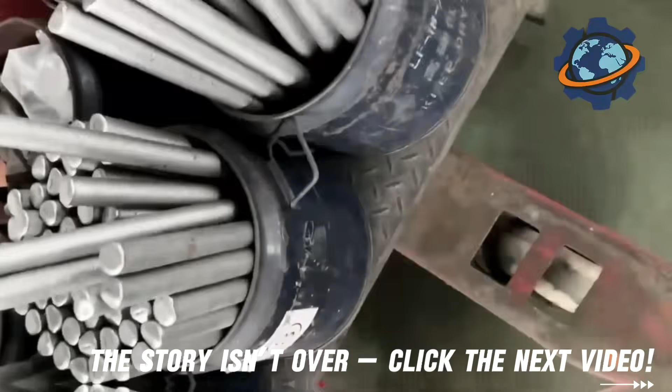Some rare earth minerals have magnetic properties, which allows them to be separated from non-magnetic components using magnetic separators. After enrichment, a concentrate is obtained, which contains a much higher concentration of rare earth elements. However, this concentrate is still not a pure metal. It requires further chemical processing, which usually includes dissolving the valuable components with acids or alkalis, precipitation, solvent extraction, and ion exchange chromatography. These processes allow for the separation of each rare earth element individually and its purification to a high degree. For example, neodymium is separated from other rare earth elements like praseodymium or samarium.

The final result of this complex chain of processes is the production of high-purity neodymium oxide, which is then reduced to metallic neodymium. This metallic neodymium, in the form of granules or ingots, is ready for the next stage, alloying with other components to create powerful neodymium magnets. The entire process requires strict quality control and significant energy expenditure, but is absolutely necessary to obtain the raw material for the production of these strategically important materials.

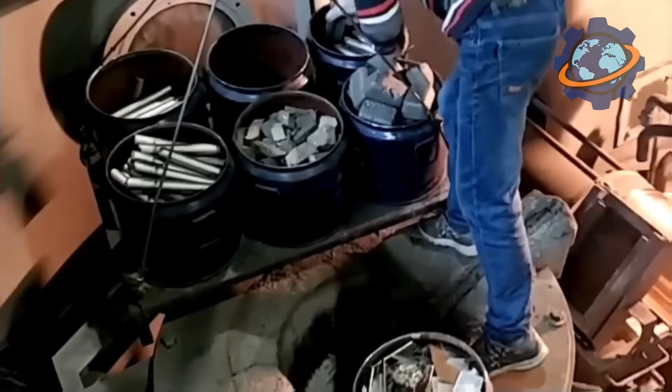After the careful extraction and purification of rare earth elements, particularly neodymium, comes one of the most crucial stages in the production of high-performance neodymium magnets: alloying. This process demands extreme precision and control, as the final microstructure and, consequently, the magnetic properties of the finished material depend on it. The purified metals, neodymium, iron, and boron, are carefully weighed in strict proportions. These three elements are the main components of the alloy, providing its unique magnetic characteristics.

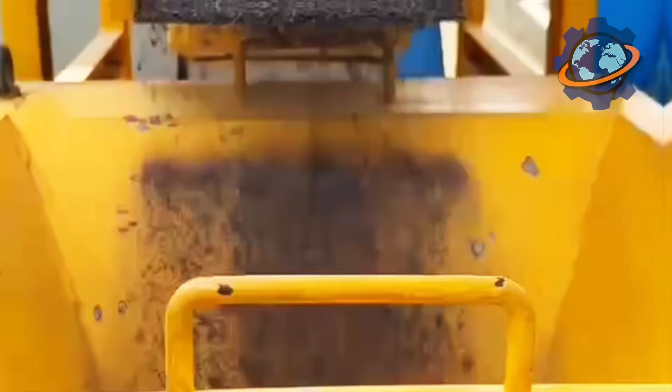In addition to them, small amounts of other elements such as dysprosium, terbium, cobalt, or copper may be added to the alloy. These additives are introduced to achieve specific properties, for instance, to increase the magnet's temperature stability, improve its resistance to demagnetization, or modify the material's brittleness. The exact composition of the alloy is a trade secret for many manufacturers and varies depending on the desired final characteristics of the magnet. The weighed components are placed in a specialized vacuum induction furnace.

The use of a vacuum is critically important as it prevents the oxidation of the rare earth metals and other components at high temperatures. Oxidation would lead to the formation of undesirable phases, which would degrade the magnetic properties of the material. Induction heating ensures rapid and uniform melting of all components, creating a homogeneous melt. The melting temperature in such a furnace can reach over 2,700 degrees Fahrenheit.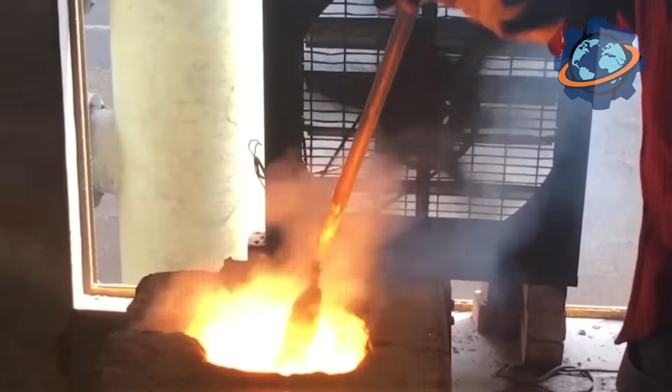After achieving a complete melt and homogenization of the alloy, the stage of rapid cooling, known as the strip casting method, begins. This is a key moment for forming the optimal microstructure. The molten metal is poured in a thin stream onto a rapidly rotating, cooled drum. Contact with the cold surface of the drum leads to an extremely rapid cooling of the melt at a rate of up to millions of degrees per second. This extremely rapid cooling prevents the formation of large crystal grains and allows for the formation of an amorphous or microcrystalline structure.

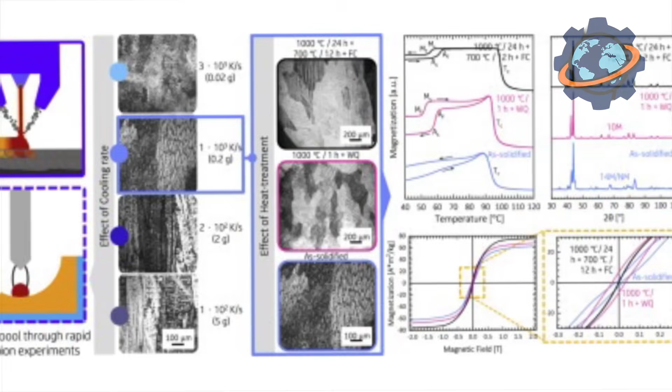Instead of the typical crystalline structures formed during slow cooling, extremely fine grains are formed. This process is also known as rapid solidification, and it is fundamental to achieving high magnetic properties. The resulting material takes the form of thin, easily crumbled flakes or ribbons. This unique microstructure, with very fine, often anisotropic grains, is the key to the high strength of neodymium magnets.

The smaller the grain size, the more difficult it is for the magnetic domains to change their orientation, which provides high resistance to external demagnetizing fields. Thus, the alloying and rapid cooling stage is fundamental for forming the magnetic characteristics that will later be locked in during subsequent production stages. After the alloying and rapid cooling stage, when thin flakes or ribbons of the neodymium iron-boron alloy have been formed, a stage called hydrogen decrepitation begins.

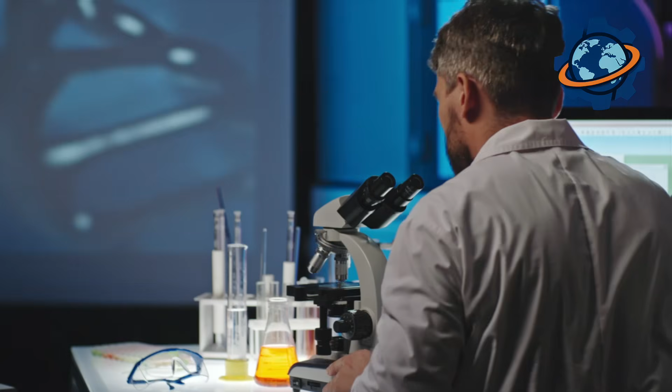Every year, millions of tons of chemicals are produced worldwide, but one of them, chlorine, is truly staggering in scale. In the United States, over 12 million tons of this gas are made annually. That's the same weight as 120 Gerald R. Ford aircraft carriers, the heaviest ships in the world. But where does this dangerous, yet vital substance come from?

It all starts not in a lab, but in underground deposits of common salt. From there, it involves electricity, membranes, and an entire industry that consumes more power than entire American states. And if you watch till the end, you'll discover the secret that chlorine hides behind its sharp smell.

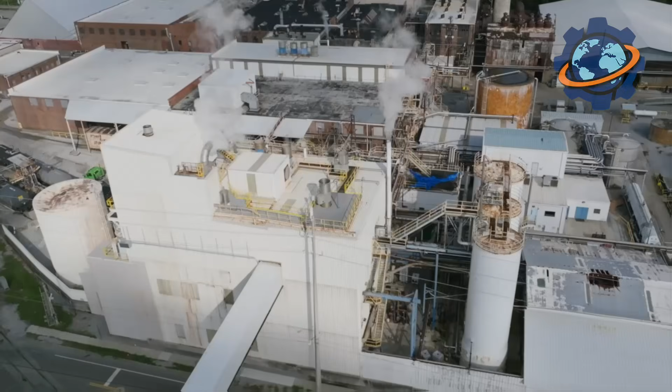The United States is one of the world's largest producers of chlorine. Each year, plants in the country produce over 12 million tons of the gas. This number is just hard to wrap your head around. Imagine the weight of the aircraft carrier, the Gerald R. Ford, the heaviest warship in the world. It's about 100,000 tons. This means that in a year, American industry produces as much chlorine as 120 of those aircraft carriers weigh. This enormous quantity makes chlorine one of the top 10 most produced chemicals in the country.

It all begins not in a laboratory, but deep underground. The main ingredient for our recipe is common rock salt, or sodium chloride. But it doesn't arrive at the plant in salt shakers. It's either mined in the form of huge chunks, or, far more efficiently, pumped out from under the ground. Water is pumped into deep underground salt deposits. The water dissolves the salt, creating a saturated salt solution called brine. And it's this concentrated, salty as tears solution that is our raw material.

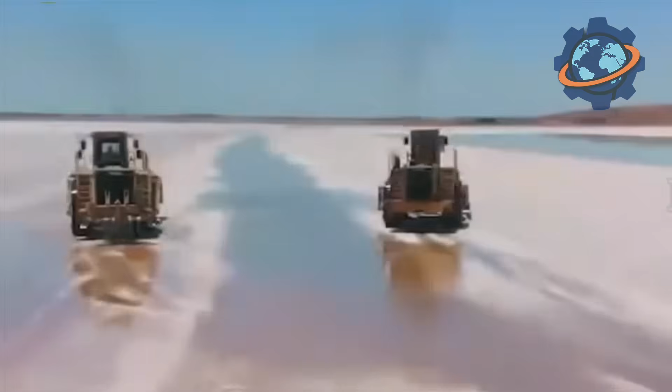But it's still impure. It's full of contaminants, calcium, magnesium, and other minerals that can clog up our expensive equipment. So before the main show begins, the brine goes through a thorough purification process. It's passed through a whole series of tanks where chemicals are used to precipitate and filter out all the impurities. What comes out is a perfectly clean, clear, and very salty solution, ready for the main event, electrolysis.

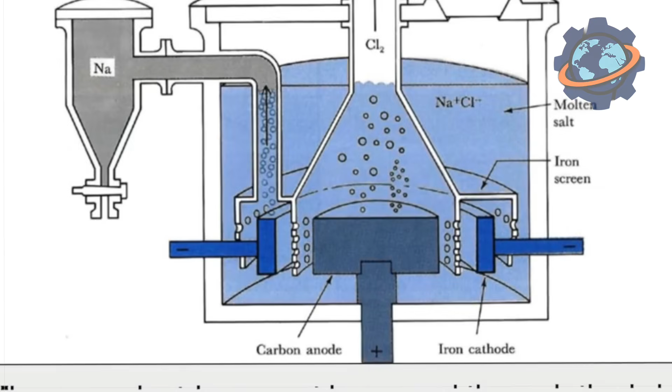Now, let's head to the heart of the plant, the so-called cell room. This is a huge loud hall filled with rows of strange enclosed tanks connected by a network of pipes and thick electrical cables. These are the electrolyzers, or cells. This is where all the magic, or more accurately, all the chemistry will happen. Let's imagine one such electrolyzer. Essentially, it's a box into which our pure salt solution is poured. And into this solution, two electrodes are submerged, a positively charged anode and a negatively charged cathode.

Now, a direct electric current of colossal power is applied to these electrodes. And this is where the split begins. The salt molecule in the water breaks down into positively charged sodium ions and negatively charged chloride ions. The electric field forces them to move. The positive sodium ions are drawn, as if by a magnet, to the negative cathode, and the negative chloride ions to the positive anode. And it's at the anode that the whole point of the process occurs. Each chloride ion that sticks to the anode gives up its extra electron.

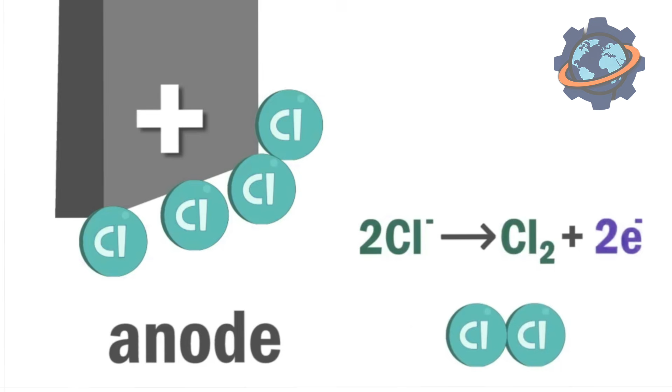Two such chlorine atoms, having lost their charge, immediately pair up, forming a molecule of chlorine gas. Billions of these molecules gather, and tiny bubbles of a greenish-yellow gas begin to appear on the surface of the anode. This is our chlorine. The main resource for chlorine production is electricity. The chlor-alkali industry is one of the largest consumers of electricity in the entire US manufacturing sector. To produce 1 ton of chlorine, it takes about 2,500 kilowatt hours of electricity.

Now, multiply that by 12 million tons a year. It turns out that this industry consumes about 30 billion kilowatt hours annually. That's more than the annual electricity consumption of entire states, like Vermont or Wyoming. It's like an entire city of 1 million people, working year-round just to split salt molecules. But what's happening at the cathode? The sodium ions have drifted over there.

But they don't turn into metallic sodium. Instead, the electric current splits the water molecules in the solution into hydrogen and hydroxide ions. Bubbles of pure hydrogen are released at the cathode. That's our first byproduct. And the hydroxide ions left in the solution combine with our sodium ions to form sodium hydroxide, or caustic soda. This is our second, incredibly valuable byproduct.

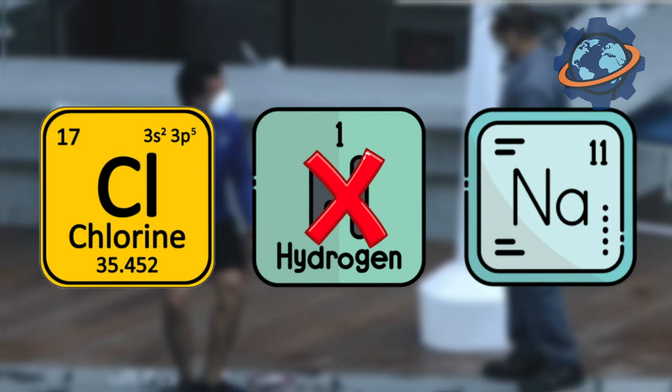But here, a huge problem arises. We've just created 3 substances: chlorine, hydrogen, and caustic soda, and they must never be allowed to mix. Chlorine and hydrogen together form an explosive mixture, and chlorine and caustic soda react to form bleach, which is not what we want at all.

So, the genius of the technology lies in separating these 3 products at the very moment of their birth. This is done using special membranes or diaphragms. Imagine a thin, paper-like, but very clever partition standing between the anode and the cathode.

This membrane, made of a special polymer, is like a bouncer at a nightclub. It allows the positive sodium ions to pass through to the cathode, but blocks the negative chloride ions, preventing them from getting into the cathode space. This way, chlorine is born and collected in one part of the cell, while hydrogen and caustic soda are in another. Now we need to collect our harvest.

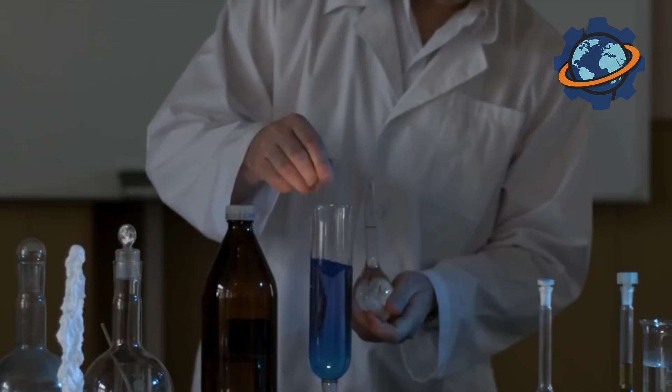The moist, hot, greenish-yellow gas is continuously pumped out of the anode chamber. First, it needs to be cooled. It's passed through heat exchangers where it gives off its heat. Then, it needs to be dried. Chlorine is incredibly aggressive, especially when wet. It corrodes almost everything. But there's one substance it doesn't touch: concentrated sulfuric acid.

So, the wet chlorine is passed through towers where it bubbles through sulfuric acid, which, like a sponge, absorbs all the water from it. The resulting dry, cool, but still gaseous chlorine is ready for the next stage: liquefaction. It's compressed under enormous pressure and cooled at the same time. Under this double whammy, the gas turns into a clear, amber-yellow liquid that looks like oil.

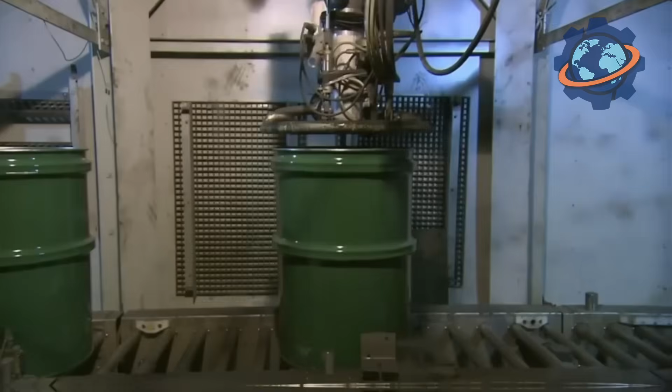This liquid chlorine is much easier to transport and store. It's poured into special thick-walled steel tankers, or rail cars. Every step of this process is carried out under completely sealed conditions, because a leak of this gas is deadly.

And what about our byproducts? They are no less important. The hydrogen we've produced is collected, purified, and used either as fuel for the plant itself, or sold for ammonia production, or in the food industry. And the resulting caustic soda solution is pumped out, concentrated by evaporating the excess water, and sold. It's one of the most important products in the chemical industry, used to make soap, paper, aluminium, and much more.

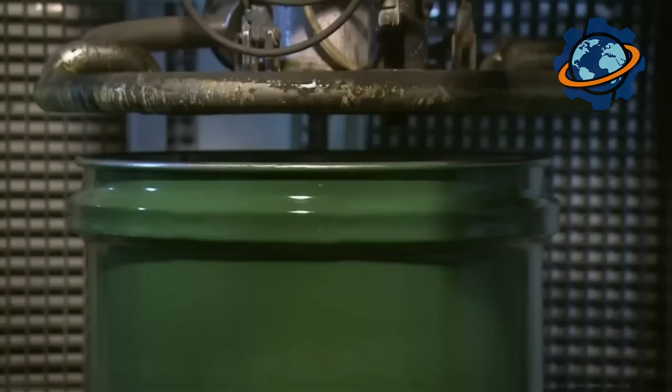And so, from simple salt water, by passing a huge amount of electricity through it, we learned to obtain 3 extremely important substances at once, which form the foundation for thousands of other products that surround us in our daily lives. Now let's see where all this enormous amount of chlorine goes. You might think it all goes into disinfecting swimming pools, but that's just a drop in the ocean. In fact, less than 5% of all chlorine is used for water disinfection. So where does the other 95% go?

It's a key building block for other products. About 40% of all chlorine goes into the production of this universal plastic. The vinyl windows in your house, water pipes, medical IV drips, vinyl records, the credit card in your wallet, all of these were born thanks to chlorine.

Another 40% or so is used to create thousands of other organic and inorganic compounds. Pharmaceuticals, solvents, refrigerants, herbicides, insecticides. The list is endless. Chlorine is also a key component for bleaching paper, giving it that clean white color.

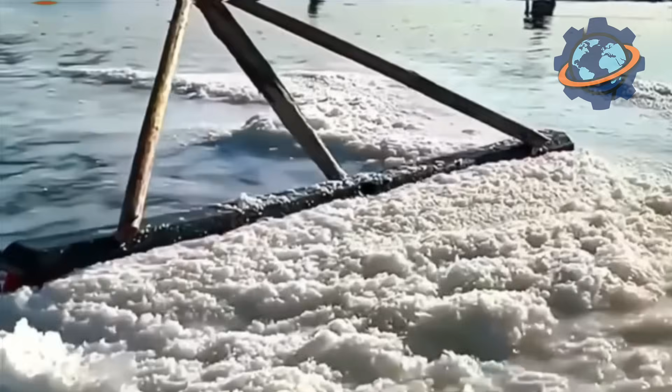And finally, about the byproducts, which are actually no less important. We remember that for every ton of chlorine, we get about 1.1 tons of caustic soda. This means that American industry produces over 13 million tons of this vital alkali annually. This makes chlor-alkali production a perfectly balanced business. When the demand for one product falls, the demand for the other can rise, allowing plants to operate stably.

So these millions of tons are not just statistics. They are proof that this sharp, suffocating gas is the invisible foundation for a huge part of the American economy. From the plastic pipes under our streets to the medicines in our pharmacies.